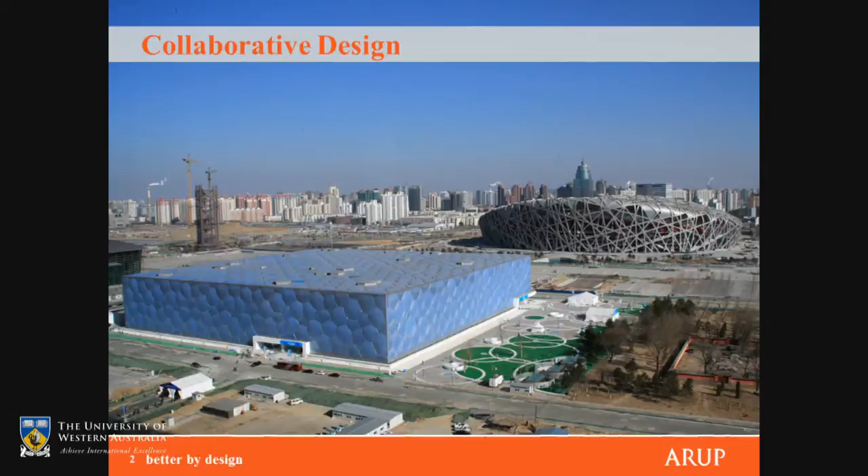It was a 10-week competition, and we did something quite unusual - which I'm surprised to say I've never done before nor since. What we did is we lined up the 10 lead engineers leading their disciplines to say on day one what success would look like to them, and what they thought a swimming centre should be from their discipline's perspective.

The mechanical engineers said it's about 14 degrees on average in Beijing during the year, but inside a swimming centre we probably want water temperatures of about 28, especially in a leisure pool, to keep people comfortable. Therefore it's a heating problem, and the best way of heating something is to absorb as much solar energy as possible, make use of it, and stop it getting out. So they wanted an insulated greenhouse.

The electrical engineers said, from a lighting perspective, that'd be great too, but only if we diffuse the daylight. Because you get real glare problems if direct sunlight reflects off swimming pools, and it becomes a safety issue.

The next people, who are highly influential and often not even in the room at the beginning of a project, were the acousticians. They said, that's all very well, chaps, but if we make it out of glass it'll sound awful. Tiles - you need around swimming pools for hygiene reasons - reflect sound, water reflects sound. If the roof and walls also reflect sound, it will sound appalling and be an unpleasant place to be.

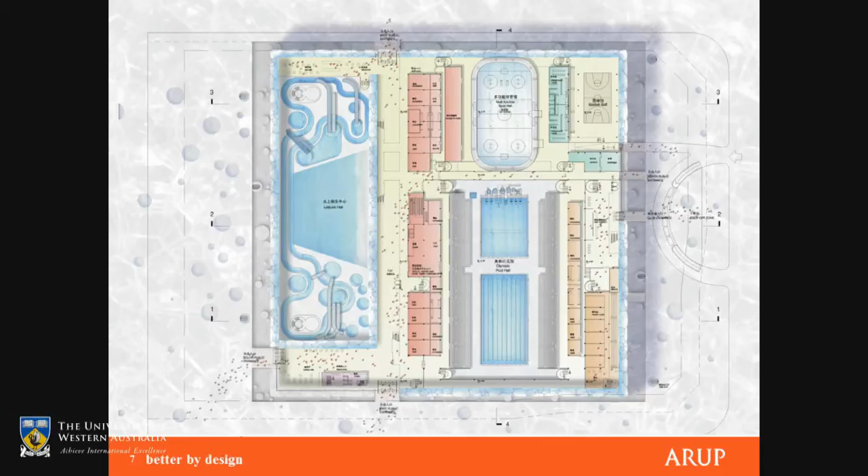But of course, architects also come in different flavours - it's not just the engineering disciplines that split ourselves up. What the Americans call program architects - I don't think there's quite an equivalent in Australia or the UK lexicon - those who worry about how a building should be laid out, which function goes where, worked out that really the key to a successful Olympic swimming centre is very simple.

It's to have a use after the Olympics. It's not so much about the actual competition pool hall, which is very specified, but about putting in as much leisure facility as possible for the people of Beijing to use afterwards. So they simply maximised the footprint of the building to fill the whole site, which happened to be square, and so we had a square building.

The urban designers, the people who care about how the building fits into the environment around it, said we've got this brilliant opportunity because the Olympic site is right on the north-south axis of Beijing, which goes through the middle of the Forbidden City and is the primary cultural axis of the city. Down to the south is the Temple of Heaven, one of the most important cultural sites in Beijing.

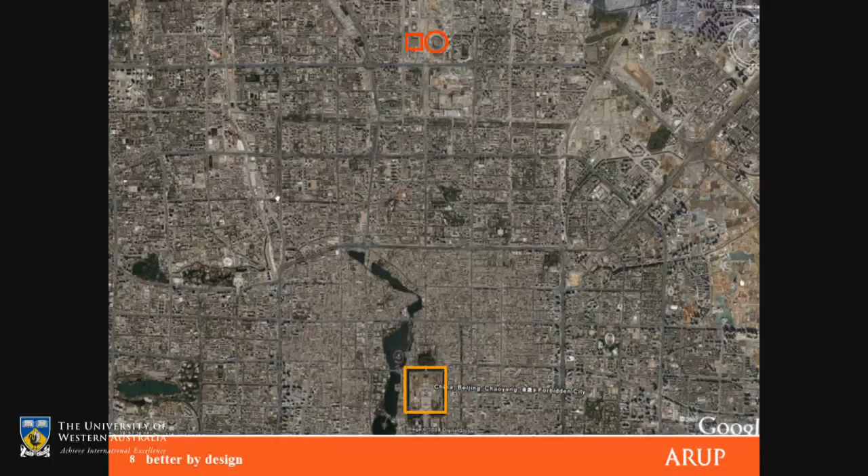The east-west axis is the commercial axis of Beijing. We had this opportunity from the master plan already proposed, where the stadium and the aquatic centre became the gateway from the city on this major axis into the site for the rest of the Olympics. So what they said was, it's how these two respond to each other that counts.

These were all very well. We put all these things up on day one, and four weeks later we were still arguing about what we were meant to do. The Chinese architects were drawing icebergs with mist curtains around them, while the Australian architects were drawing waveforms. They both agreed they wanted something that was absolutely a physical manifestation of water, thinking that was the way to win an international design competition. But we didn't actually know what to do.

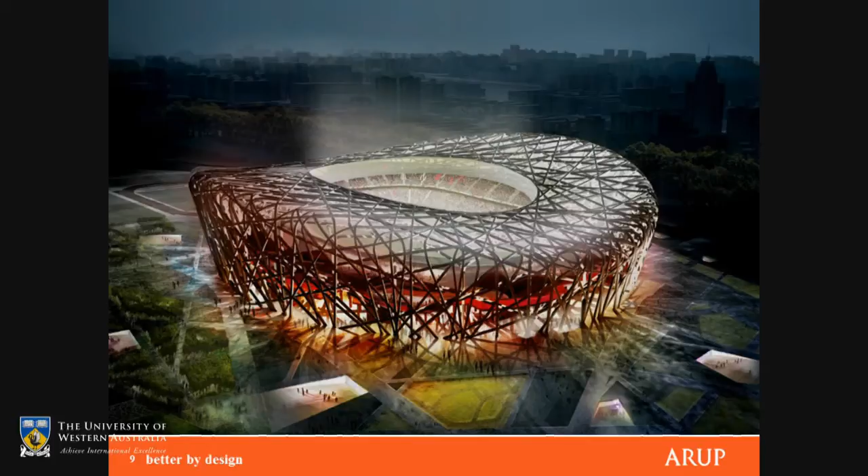Then, fortunately, our neighbour's Bird's Nest Stadium scheme was published. They were having a competition at the same time, just a little ahead of us. This winning scheme by Herzog and de Meuron, with Arup as engineers, came out in the press. I'll never forget it, twenty people sat down around a table and said, okay, theirs is red and round, so we'll do a blue box.

I know it sounds trivial, but it was honestly like that. It was simply that we wanted yin and yang. Red in Chinese cultural mythology is masculine, blue is feminine. Circular things speak to the heavens, square things speak to the earth. One's internally focused, one's externally focused.

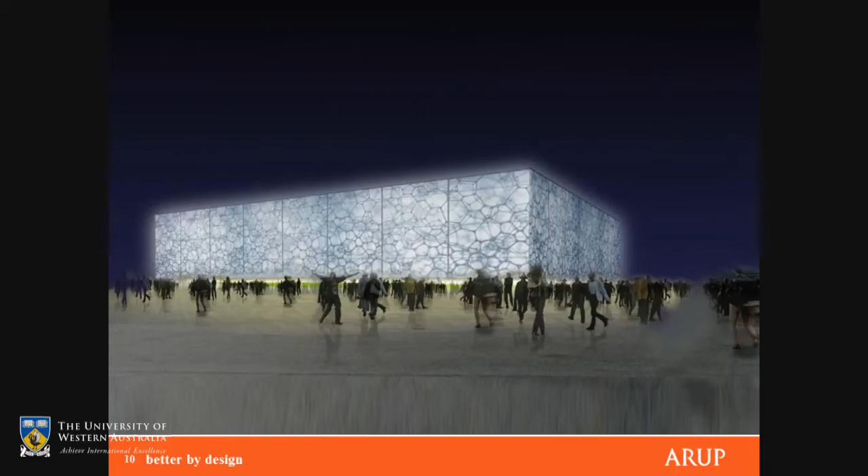At the same time, we brought all those ideas from the first day, which had been sitting in people's heads but hadn't actually been put forward properly yet, to the table. We made it out of ETFE, made it an insulated greenhouse, gave it natural light, and made it sound good.

So the structure, my part, was undetermined at this stage. But we did know we needed two layers of these ETFE pillows, because to make ETFE—a 0.2 millimetre thick plastic, really just a polythene bag—into something that could do anything, you have to inflate it with air and make it pressurised. We knew we needed two layers of these pillows to keep the heat in at night, otherwise all the heat gained during the day would just go out again.

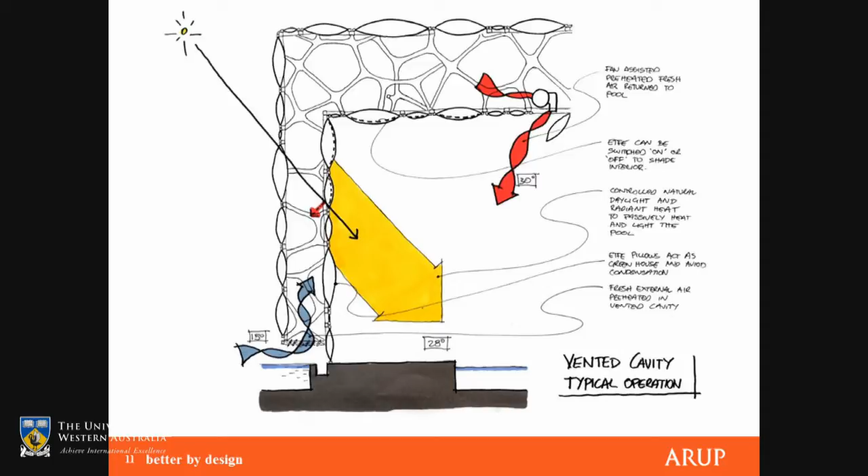At that point I looked at this and said, that means there's a space between the inside pillow and the outside pillow where I can put my structure, neither inside nor outside. Then I thought, well, how does that structure want to inhabit that space? It's not a question we normally ask. We normally ask how structure encloses space for human habitation, how you build walls and roofs. I suddenly thought, how does structure inhabit space? I realised that question had never arisen before—I'd never heard anything at university or afterwards that answered that.

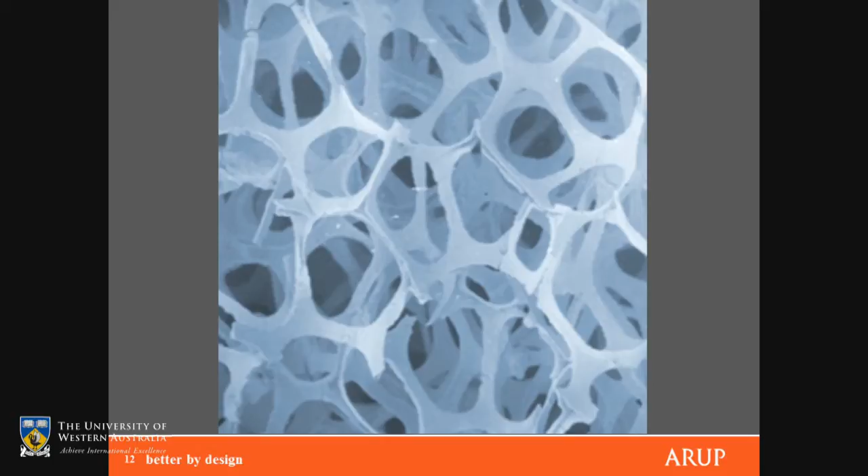Then I saw this photograph, which I took to be some piece of biology, an organic material, and I said, that looks to me like structure inhabiting space. That's what we're going to do. That was a great aha moment, followed up with: but what is it? And how do you define it? And how do I work it out?

Then the magic—2003 was really the early days of the internet, and I found that the World Wide Web could help with all these matters. So I went out and did some research.

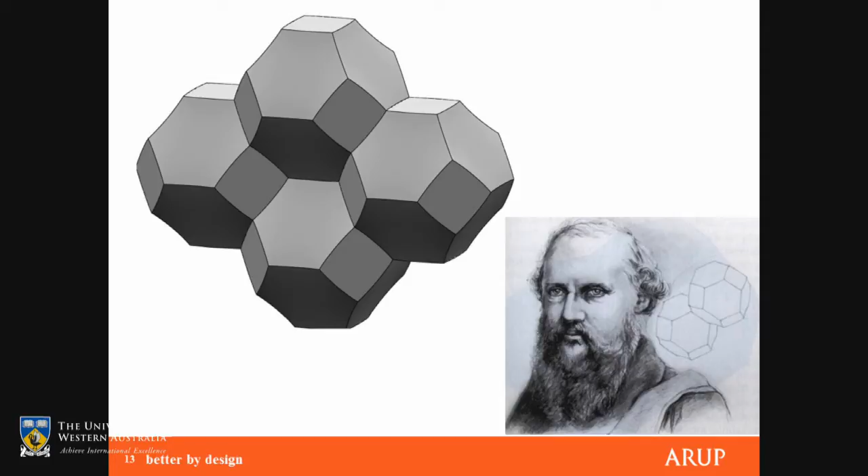I found out that Lord Kelvin, in the 1890s, had asked the question: how do you subdivide three-dimensional space in the optimum fashion into equal volumes? He came up with this thing called Kelvin foam, truncated octahedrons, as the optimum way of doing it. All his friends and colleagues had a look at it and tried as well, and none of them could do any better, so they gave up. For 100 years, that was the answer. But it didn't look very exciting to me, and it didn't look very like my photograph either.

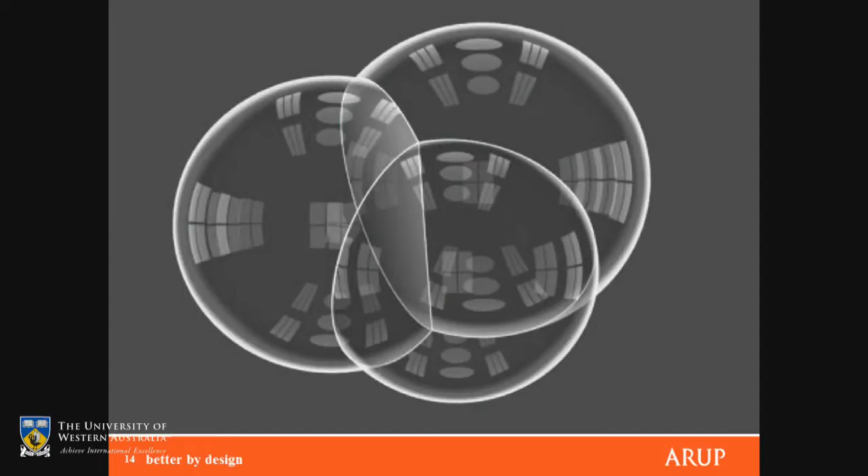I then found a Belgian physicist at the same time, a fellow called Plateau, was looking into soap bubbles. An infinite array of soap bubbles will also be the answer to how you subdivide three-dimensional space, because the surface tension will try to minimize the surface area, which is the same challenge. Plateau observed that soap bubbles always come together: three films at 120 degrees, and at the end of a line, four lines come in at the tetrahedral angle - I think it's 109.47 degrees.

So I said, well, that's the answer, isn't it? All you have to do is draw those lines and keep drawing them in a 3D CAD model, and you'll come up with the answer. Well, of course, it doesn't work like that - otherwise somebody would have worked it out a long time earlier.

Lastly, I found that a fellow called Professor Weaire and his PhD student, Dr. Phelan, in Trinity College Dublin, in 1993, about 100 years after Kelvin, had come up with a formation of geometry which was more efficient than Kelvin foam. It's made of these two polyhedra collected together to form the molecule, which then repeats. It's mainly made out of pentagons with the odd hexagon in it.

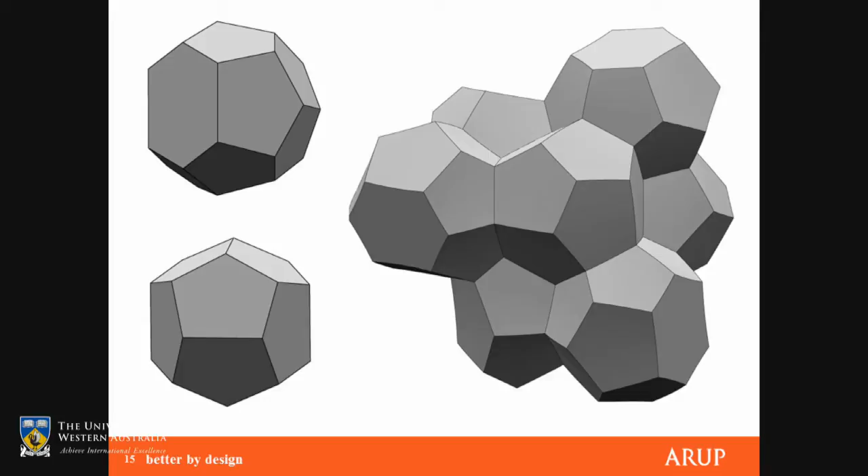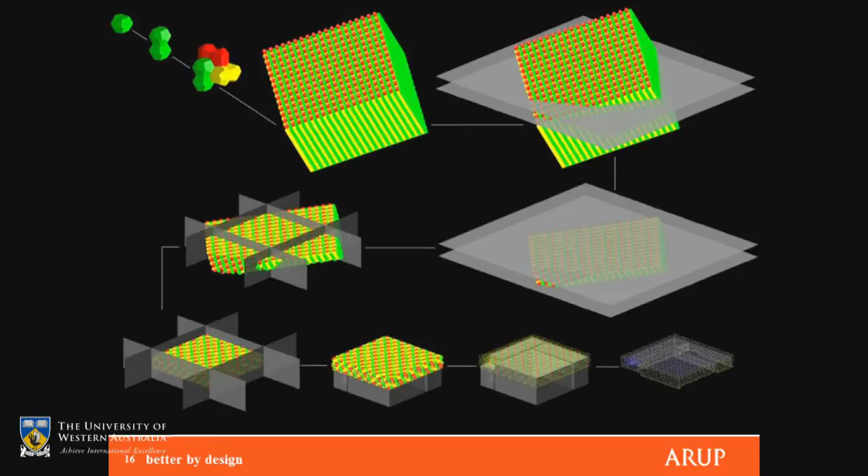What I found is that if I took a very large block of Weaire-Phelan foam and then cut it at a skew angle - that was the clever bit, or the odd bit. Going across the top from left to right, then the middle from right to left, then the bottom, you see how we did it. We took a block of the foam at a skew angle, chopped out a 50-metre height of it, then on plan in the middle, chopped out a 200-metre square box. Then on the bottom, we hollowed out the spaces, the volumes we wanted to occupy, the actual halls inside the centre itself, and you end up with this wonderful structure.

This was really new to us, because all of that was done inside a machine. It wasn't done on the back of a napkin. It wasn't done with paper and pencil. And it came out with 22,000 elements joined together at 12,000 nodes or intersections.

And we said, that's it, that's what we want to do. It's going to be a structure like no other. It produces a wonderfully random pattern for the pillows to go on the surfaces, which is just what the architect liked. The only question now was, how do we show the judges that this is what we're putting forward?

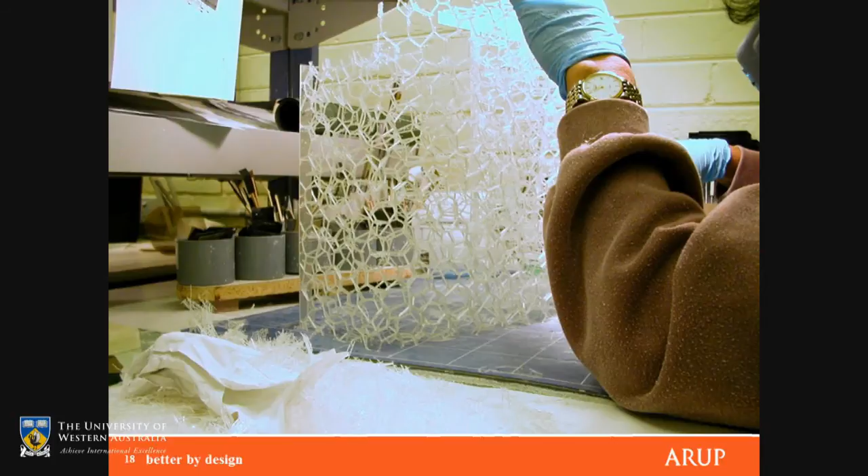So we said, that's easy, we'll just make a model - a physical model. As you might realize by now, this isn't going to be an easy thing to make a physical model of. So we said, that's okay, because there are these things called rapid prototyping. We'll make one of these wonderful models using a computer-driven rapid prototyping machine, never been used in the architectural engineering world before, but commonplace in the car and aerospace industries. But nobody had ever made a model with 22,000 different bits in it - they were used to making one piece that was a complex shape.

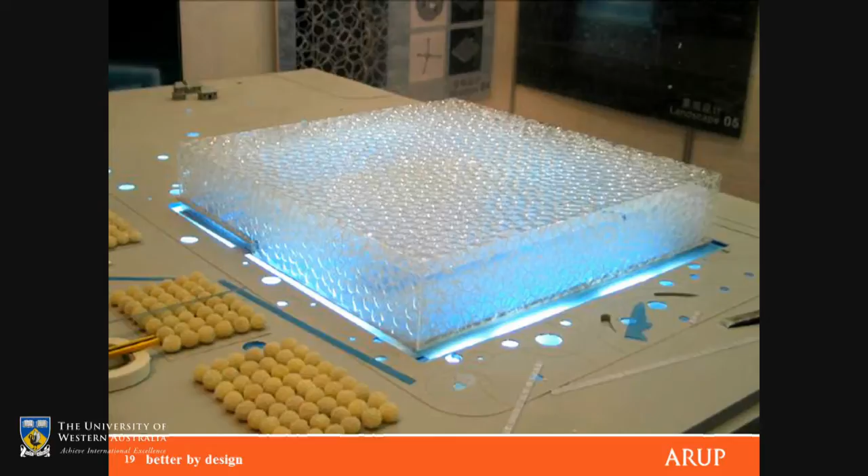It took us 4 weeks eventually to get our data in the right format to get the model to work. We made this model 24 hours before the deadline for the competition, and shipped it from Melbourne to Beijing overnight, where the Chinese had handmade the surfaces, which they glued onto the model. I'll never forget, I got a phone call saying the north wall doesn't fit. What'll we do? And for some reason, I have no idea why, I said, what happens if you turn it round?

And luckily that was the answer, and it did fit. We made the model and submitted it, and fortunately won the competition, which is great because we won from the jury, the official judges, but also the Chinese put it on the internet for public voting. Sometimes that had happened before, and I'd normally cheated a bit and asked everybody in Arup to vote for the Arup scheme. In this case, we won by 1 million votes, so I don't think the Arup voting system would have made much difference.

Then you get this incredible euphoria when you win a design competition. But of course, to win a design competition, you normally push the boat quite a long way from the shore. And then the next day you wake up and you think, aha.

Now we have to make it work. So from a structural point of view, I built an analytical model. You might think I should have done this before, but we were so busy making the physical model to convince the judges that we hadn't thought about the analytical model. I mean, it looked like a structure, it felt like a structure, if you like, it smelt like a structure. But was it one? The first time we built an analytical model, I couldn't make it stand up.

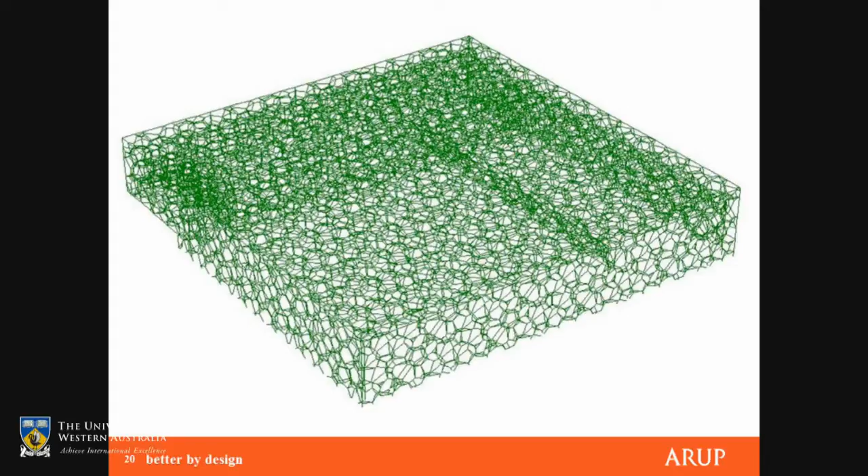If the elements were put in rather large, to make them strong enough, they were also too heavy. And if they were put in smaller, then they were too weak and the thing fell down. So again, in this brand new digital age, we invented a whole new analytical process that sorted it out for us. What we did is very simple. It seems trivial, but it was one of those breakthroughs.

You put every element in rather small, you analyze it, you find out the stresses in every element and compare it with literally the code of practice of China, not some arbitrary number, but the actual code of practice of China. If you didn't meet the code, make it bigger by one small increment. And if for some reason it seemed to be larger than it had to be, make it smaller by one small increment. Don't try and guess the actual answer, just move it in the right direction slowly.

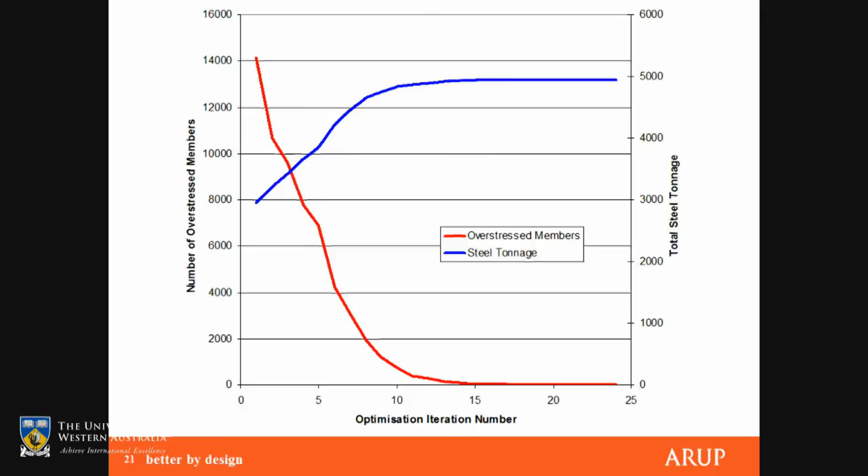And what we found after a lot of experiment was it would converge, as you can see here, after about 20 cycles, on a stable answer, which also, I'm glad to say, proved it was also an efficient structure at about 5,000 tons of steel. This picture shows you slowly - every different colour there is one of 10 different sizes. We only used 10 different sizes in the whole model. You may be able to work out now why I couldn't guess which one went where.

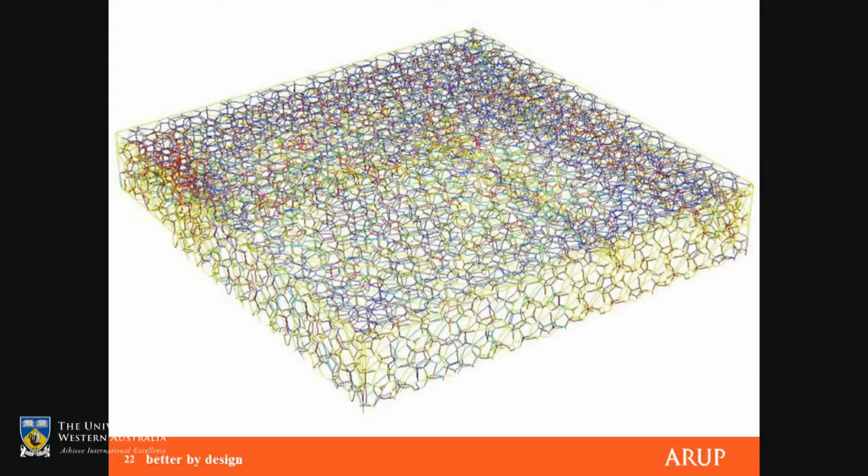Actually, the thing is so highly redundant for the structural engineers in the room that you could come up with an infinite number of solutions that also worked. It didn't matter which one you used, as long as it would then produce a set of calculations that would satisfy the Chinese authorities that in a linear elastic state, it would comply with the Chinese code. Every time you ran it, you got a different answer, which was rather nice - every day we got a different structure. So we just said one day, okay, we'll have that one.

Moving on, this shows you its dynamic properties. It is a completely framed structure - there's no triangulation in it. So it relies entirely on the moments at the end of each element.

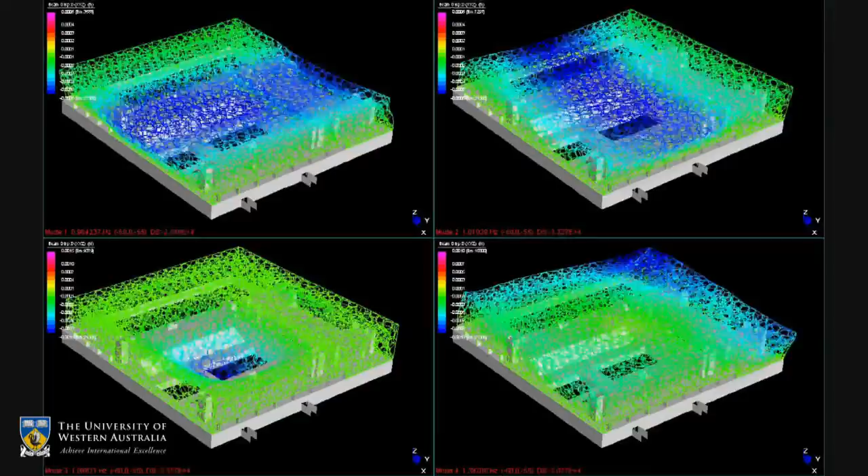What's really strange about this is these are the first 4 modes of vibration. So the top 2, left and right, not surprisingly, are very similar and have a frequency of about 1 hertz. And because it's a square thing in the end, it's doing roughly the same thing. But what amazed me is that the bottom 2, the vertical and the torsional, are the next 2 modes, and they're also around 1 hertz. I still don't know why. I can't tell you why.

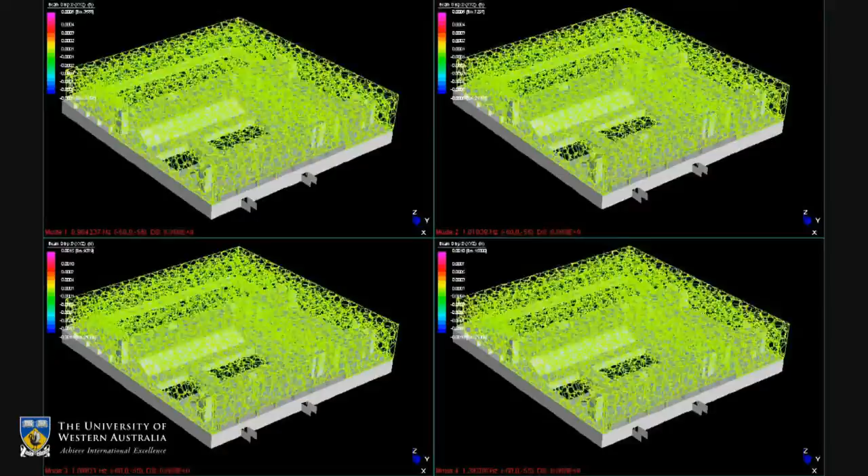But what it meant was, in an earthquake - and earthquakes are the major dominant load in Beijing - every single element played its part in absorbing energy, or could play its part in absorbing energy from the earthquake. So it actually turned out to be the most earthquake-resisting building in the world, probably. I can't prove that, but I can tell you it takes more than 1 gravity sideways, and it's still standing up quite easily. It just forms plastic hinge after plastic hinge after plastic hinge after plastic hinge until it gets to 44,000 of them before it gives up.

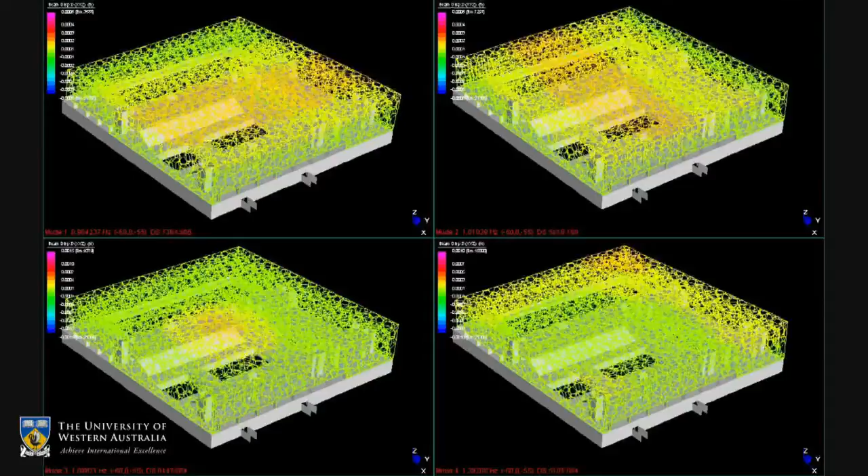Having done all the sizing of the elements inside the computer, we then wrote a piece of logic that said, well, we'll make the nodes spherical because that's an easy way of elements coming together. We'll size the spheres according to the size of the elements coming into them, and we'll write a rule so we'll develop all the spheres as well. Then all the elements get cut back until they meet their spheres. And then we have what we now call a BIM model.

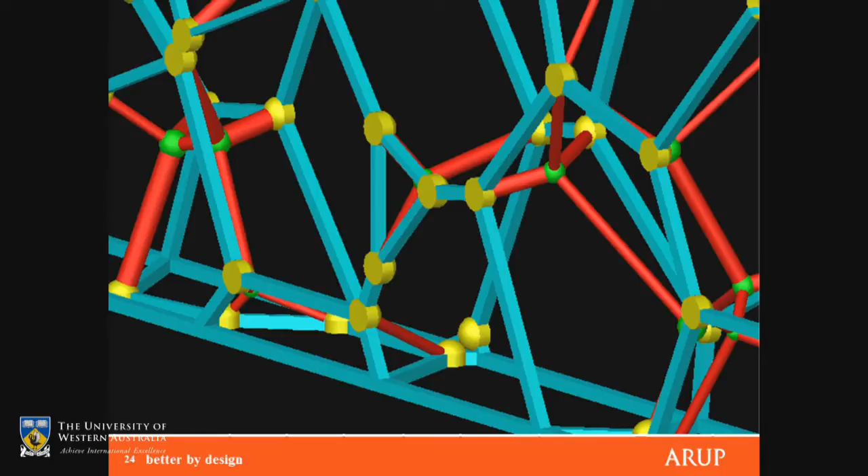We have a fully defined piece of structure. So far, it hasn't been touched by anybody, hasn't been meddled with manually, if you like. We got it down to where we could redo the whole structural process if, for example, we wanted to make the building smaller, which we had to do several times, or add a doorway, or do something to it, in 3 days. So we could go 3 days from changing it to having a new set of construction documents.

The construction documents we could portray in lots of different ways. Up till now, I'd always said there should only be 1 set of contract information for fear of contradiction. So it was normally the 2-dimensional drawings with the contract information. Here we said, well, actually, as this is just a set of data that hasn't been touched by anybody, then we can represent it any way we want.

So we can represent it, as you see on the left here, as a wireframe model with a lot of tags on it and a whole set of data saying what each tag meant. Or we can represent it on the right-hand side as a set of 2D information, or at the bottom of the right-hand side—you can barely see it, I'm sorry, it's a bit washed out—3-dimensional views of the actual connection details, for example.

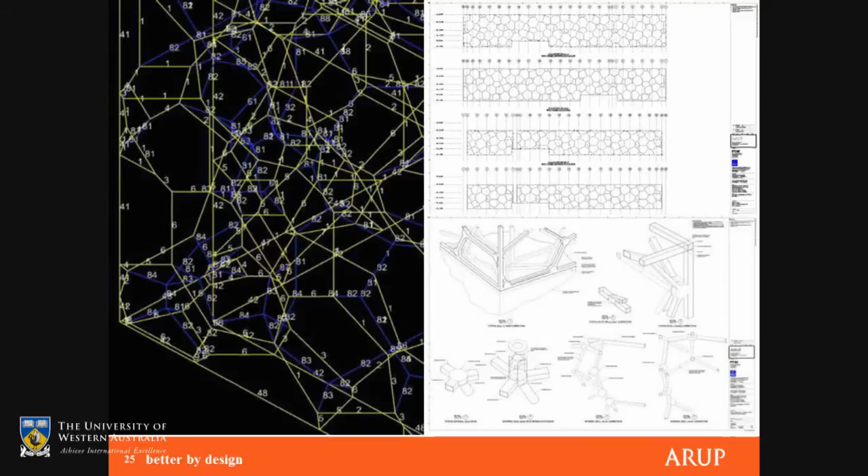But there was some magic in the original geometry, and that is that even though the tube sizes were different throughout the building, the geometry repeated because it had come from that piece of Weaire-Phelan foam that repeated. So we said the way to build it is to make a jig, which would always be a fixed jig, and you make up these little 4-legged elements, and then on site you bolt them together. And as long as you bolt the right ones together in the right order, you get the structure we first thought of. But the Chinese said, well, that looks a bit hard work.

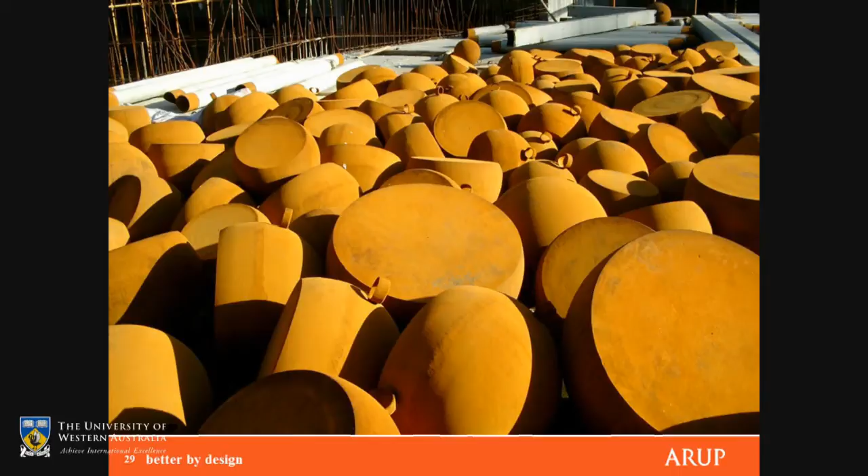Why don't we just make lots of tubes and lots of balls and a big scaffold, and we welded it together. And they did. And I have no idea whether they welded the right ones to the right ones—none whatsoever. But, I say that flippantly, because of the huge redundancy in the structure, it doesn't actually matter. You form plastic hinges wherever you needed to, and it would redistribute—the strength was there somewhere, if you will. Actually, I think they probably got it right. They took it very seriously.

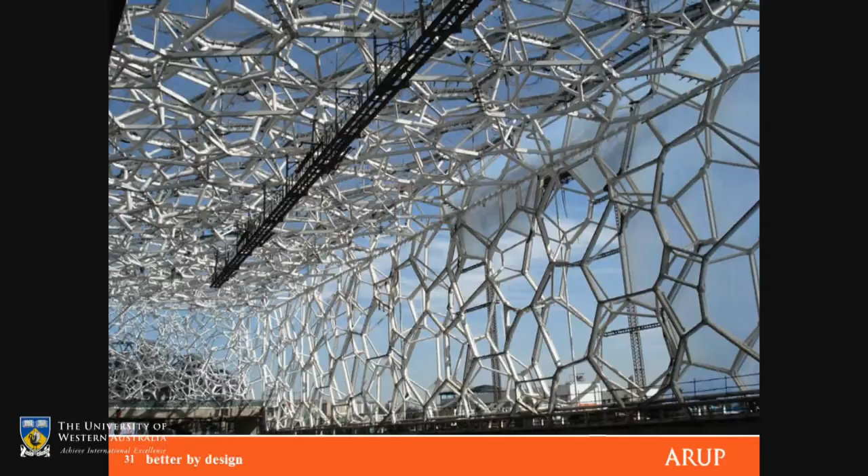And then eventually, a year later, they took the scaffold out, and we began to see what we had constructed. This is the inside of the leisure hall that you didn't see during the Olympics. It was still not fitted out. And then it was finished.

So I was invited to the official opening on Australia Day in 2008. I got the invitation at 5 p.m. on a Friday that the official opening was going to be at 9 a.m. on a Monday. But fortunately, I managed to get there.

So it's a bit like the Sydney Opera House. It changes its mood and feeling according to the lighting conditions and what you get before it, which wasn't something we totally predicted. But it was still quite nice.

And then we went inside. Inside the main pool hall, we're actually only getting 5% daylight, because the television companies wouldn't let in more than that. If it's any more, they'll black it out anyway and use floodlights, because they're worried about controlling light for television. A bit like our cameraman at the back who's spotlit me to make sure I can be filmed.

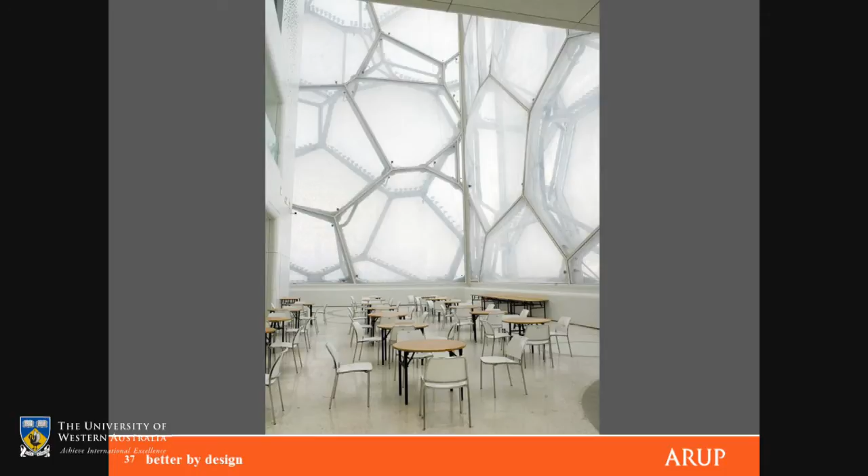This, I think, was my favourite space. This was just a cafe in one corner, but it had a real sort of serene, calm feeling, almost spiritual.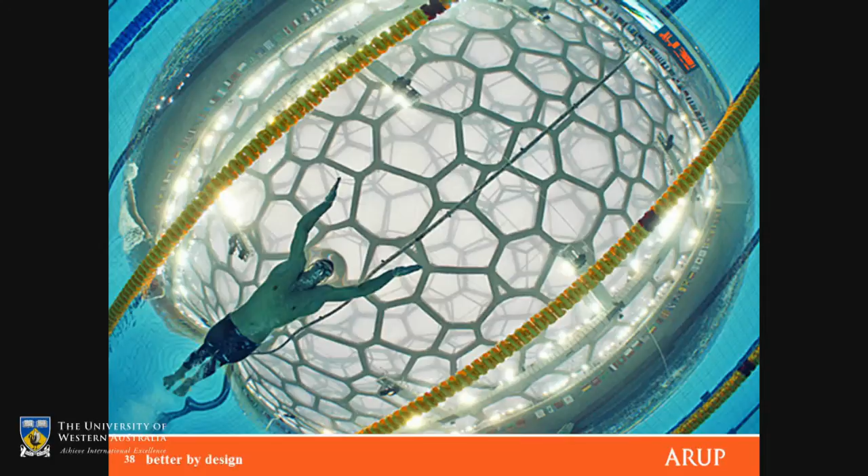And this is Mr. Phelps winning his 7th gold medal. 25 world records were broken in the swimming centre in Beijing. And to this day, I will uphold the idea that it was because it was such a beautiful place to be that caused the athletes to perform so well, and it was nothing to do with the sharkskin suits they were wearing.

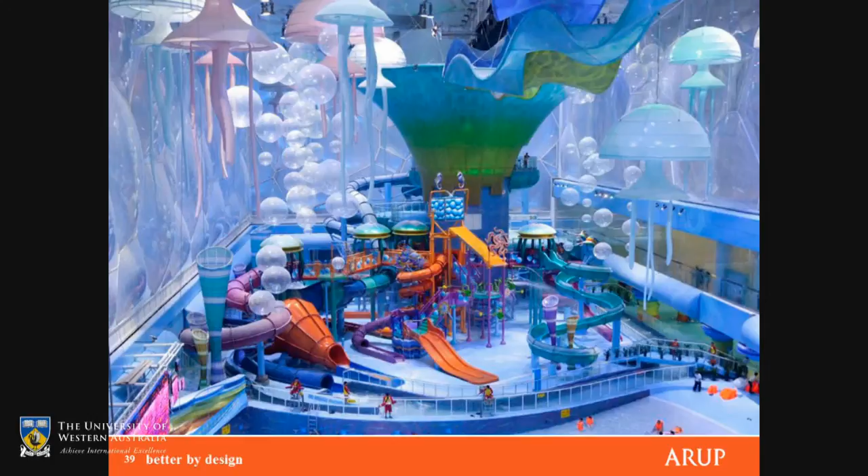And then this is the bit you didn't see at the Olympics. This is the leisure centre. So this is the legacy. This is what the people of Beijing get to use every day now.

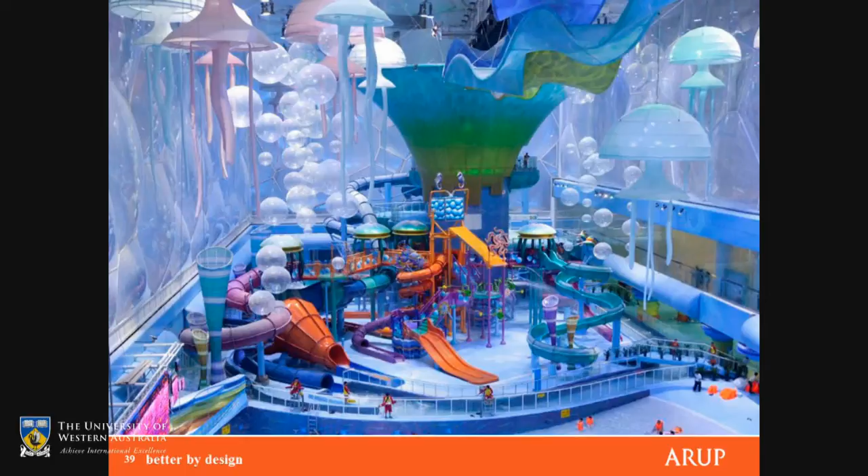At one time, the Beijing government said they didn't want to make it into a leisure centre. They'd rather make it into a posh restaurant because they thought it was so good that it should be very expensive to go into. We pleaded with them that we would much rather it were for the people of Beijing, and they acquiesced, which is great.

So there we have it. The two form this gateway. I think if you think about the Olympics, you don't remember any other buildings really than these two. There's actually a building right next door, the main convention centre, the main indoor arena, which is larger than either of these, but you probably can't remember what it was.

So I've got 3 slides among these talks about projects, pointing out some of my approaches to life or to design. The first one is, at Arup we say we shape a better world. That's our strap line, if you will. But what do we mean by that? For a long time I thought it just means we've got to make the world sustainable.

Now, I don't back down from that at all. We do have to make the world sustainable. But sustainability is a lot about reducing impacts, reducing environmental impacts, reducing financial costs, reducing social impacts. That could produce many different worlds, actually, that comply with that. And which one do we actually want?

So what about the benefits? What are we actually trying to do as well as being sustainable? In my view, it's about improving the world for people. There are tons of different levels you can look at that: make people safer, make them healthier, give them more functionality, more amenity. But ultimately, it's also to inspire them.

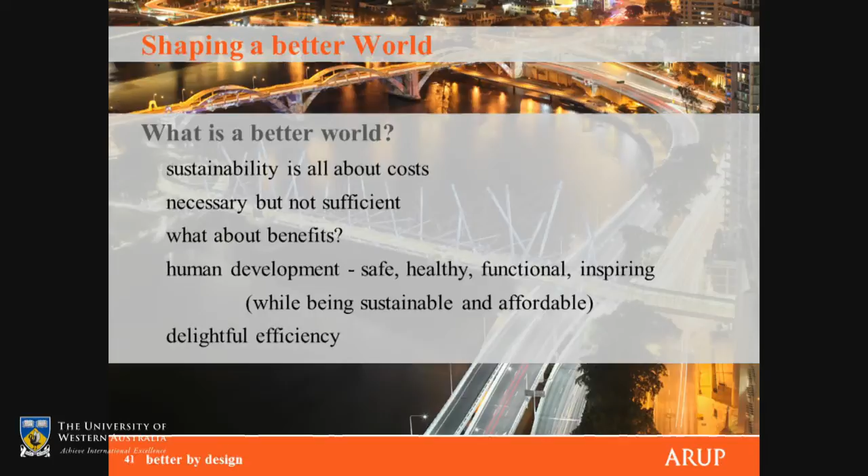So I sat down with my best friend, Philip Cox, and did this competition for a stadium in Durban for the Soccer World Cup. And you might notice that it never got built. It wasn't part of the World Cup. I still haven't got over losing this one, so I'm going to tell you about it instead. Okay?

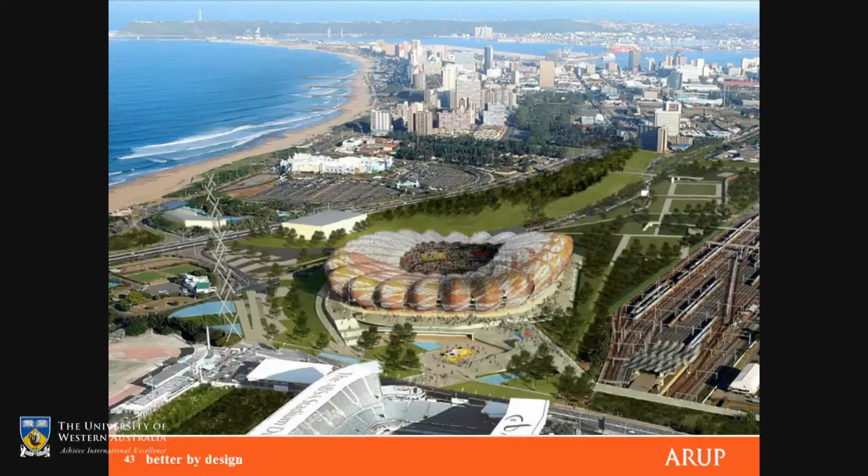This is about how an engineer and architect can try to come together and trust each other enough to work out how a form will work both as structure and architecture. It's a pretty intense and trusting arrangement because, particularly for Philip, he has to trust me that when he comes up with something he likes the look of, and I say that doesn't really work as a structure, that I'm right, and that I'm acting in his best interests, genuinely trying to find something that will work as a structure and look the way he'd like it to look.

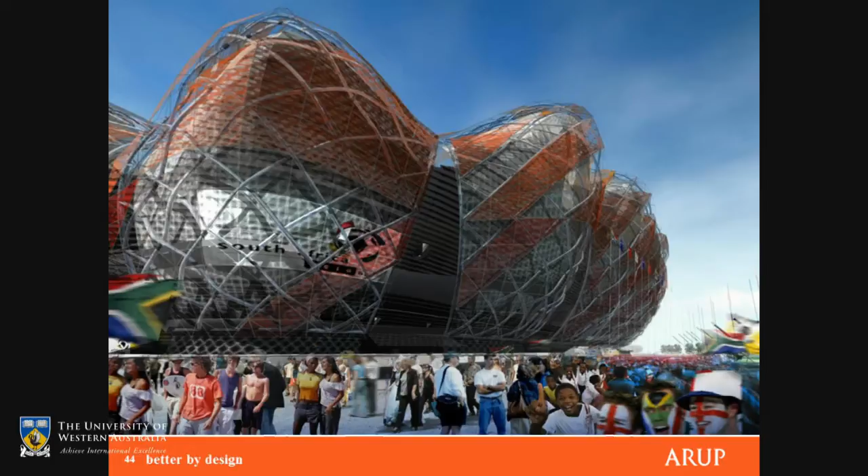After a while, we came up with what we thought was a really beautiful building that also worked highly efficiently. I'll just for a moment describe how it works.

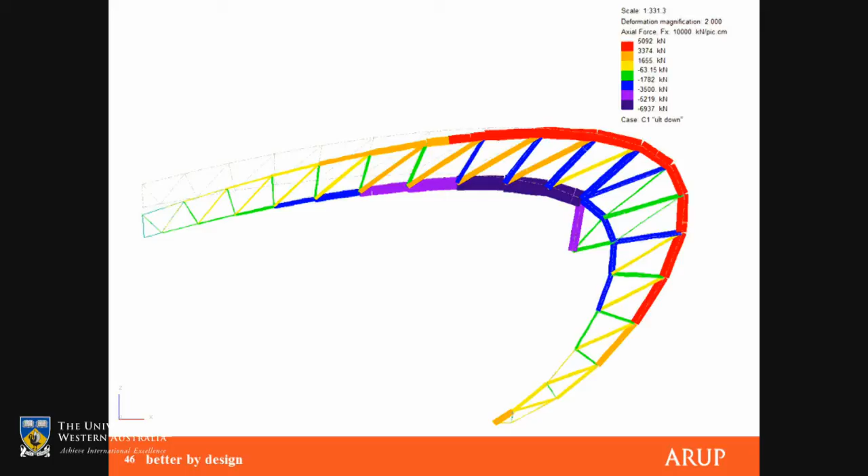If we were to work like the Bird's Nest Stadium, which are really just these big deep trusses spanning across it, this is a cross section showing something like a 9-metre deep truss cantilevering 70 metres. It shows you've got tension in the top chord and compression in the bottom chord under a vertically downwards load.

But when you do that in 3 dimensions, you have to put them sort of 12 metres apart, with spanning elements between them to hold up the cladding. You have to keep the compression chord stable laterally, so you add another layer of structure at the bottom. It's now looking pretty nasty, so you probably add a ceiling underneath, which indeed the Bird's Nest has, and you end up with a lot of steel and a bit of a jungle.

If instead you take exactly the same principles and smear them out into 3 dimensions, offsetting the bottom chords from the top chords, you can have a structure where all the structure is carrying the cladding, and where the structure is also auto-stable. That is, the difference in curvature and the offset keeps everything from buckling. You literally take out 60% of the weight by going from the truss structure to this one.

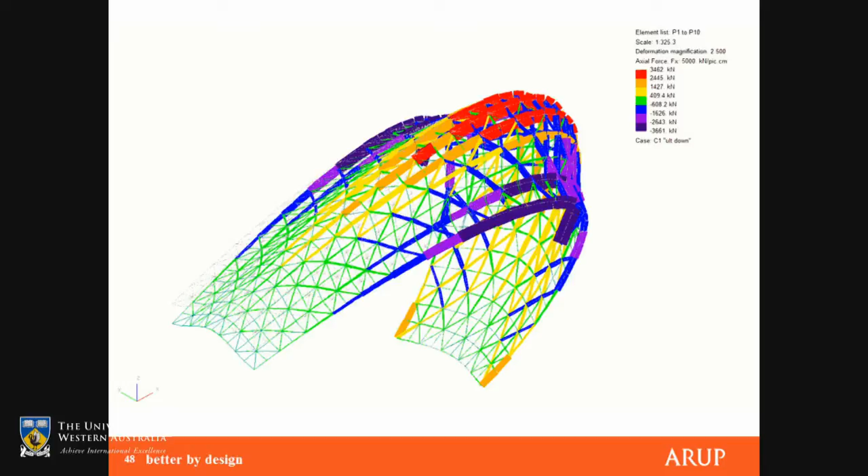In our case, the brief was for a stadium that could hold 70,000 for the World Cup and then go down to 50,000 afterwards. We could put the 20,000 extra seats up into those humps in the roof, which wouldn't have been available to you if you'd done a truss with a ceiling on it.

And the last bit, of course, is the inwards curvature of the walls, which was part of what we wanted it to look like, and also gave you exactly the right amount of floor plate at each level for that particular stadium brief. Often in stadiums, you get a problem where the floor plates get bigger and bigger as you come down, but actually there's no more facilities needed at the bottom than at the top.

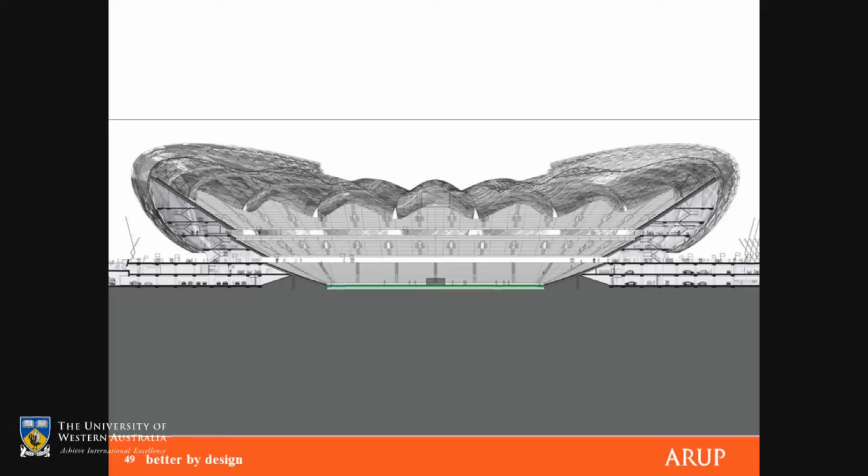The principle's the same, but it's a much more modest design. It's only a 25,000 seat stadium with a small roof. But what we did do is use parametric modelling to help us make it as efficient as possible.

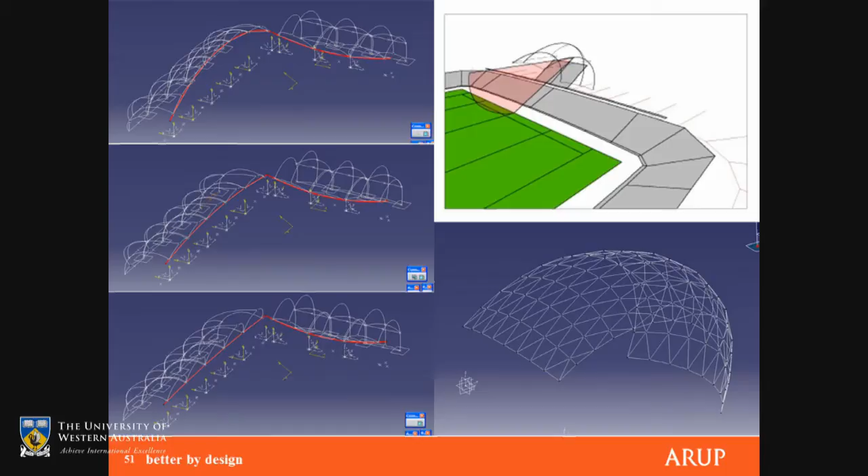On the left you see a program called CATIA, and the red line links the leading edge of the roof together. All the white lines are rule-based and follow the red line. So we've set up a whole lot of geometrical rules that operate from the red line. We adjust the red line a bit, and the structural model pops out - we size it automatically like we did at Beijing, using the same piece of software.

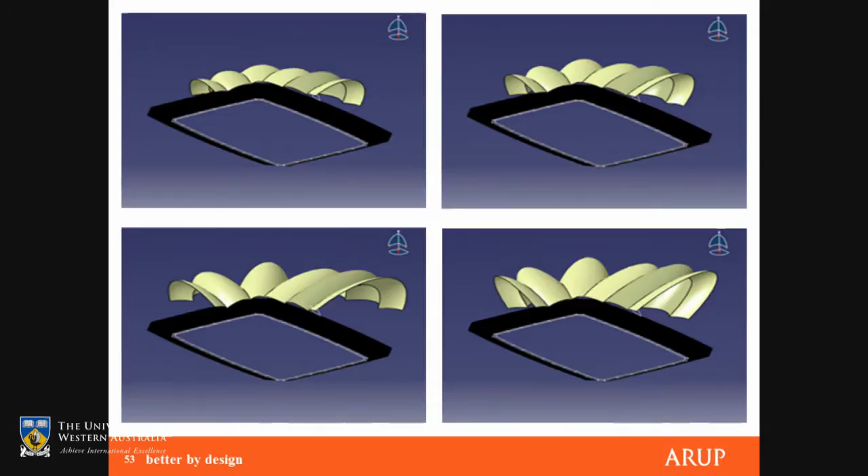The architect gets to look at it and says, do I like it? Do I not like it? Does it look better? We also looked at the panelisation of the facade, the cladding. Are we getting more or less repetition? Is it more efficient to clad it with this shape or the other shape?

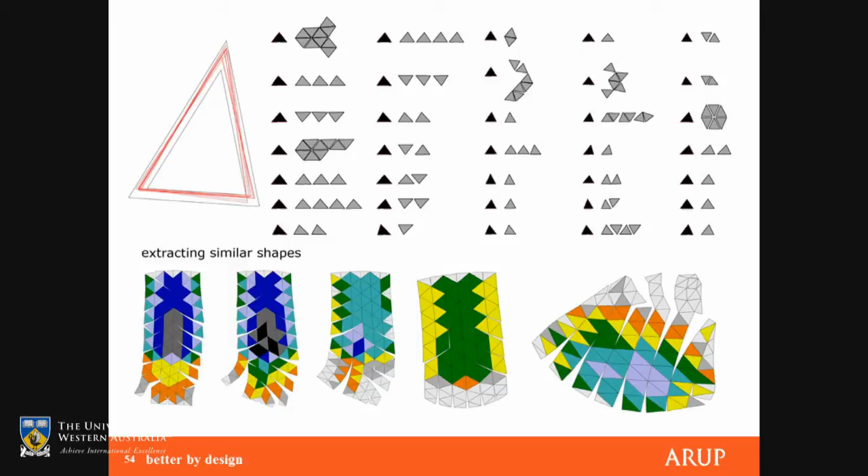In theory, you could link all these together and use some kind of genetic algorithm to sort out the most optimum solution. In reality, I find it's better to do it by hand - to adjust the red line, look at the different outcomes, and then think about how else you should adjust it to make it better. Which is more important: making it look good, making it repetitious, or making it less steel?

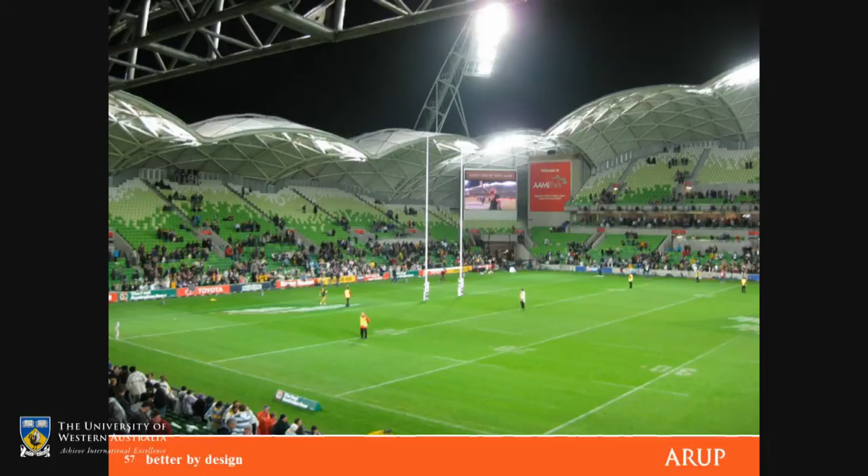In this case, we likened it to a club, where you might sit in your booth at the back. You might have your favourite piece that you always go to, that you occupy. It breaks up.

The inside of stadiums can be quite characterless. They all look the same once you're in them. We make them different from the inside, not necessarily from the outside.

Another thing, Melbourne is fantastic because here as well, you can see your stadium from the city. You can see what's happening. You can decide, am I going to go and watch a match tonight as you come out of work? Or am I just going to go and have a drink there? Or am I going to walk around the park? It's a great place.

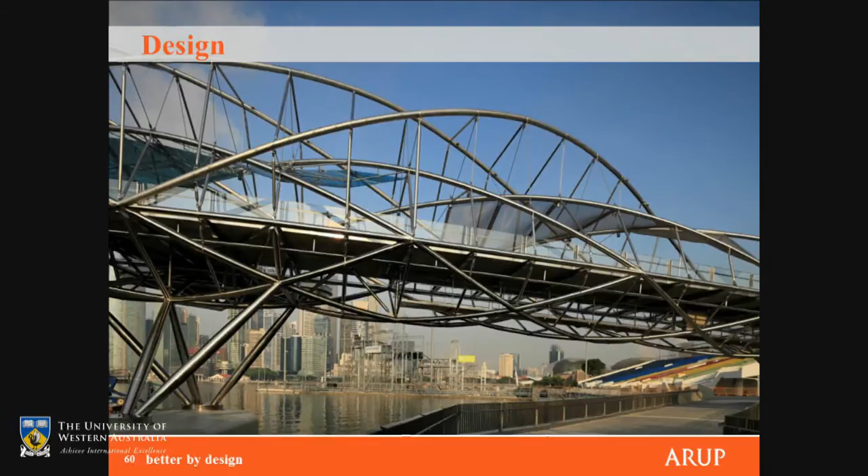So here's my second little philosophic piece, and that's about design. When I was first made an Arup Fellow 10 years ago, the first question I was asked is, so how do you do it? And I shrugged my shoulders and said, well, I don't know.

It's what I do. I'm not an academic. I don't think very much in those sorts of ways. I just do what I do. And so it made me think. So 3 or 4 years later, I decided that this is the way I tend to go about a project.

The first thing is to think about what do you want to achieve, not as a structural engineer, but what should the project achieve? What outcomes does your client really want? It's often not written in the brief, actually. You often have to go and talk to people to find out what they really want. And also, of course, stakeholders.

It's not just about what your client wants, but what do the end users want? What does the community want? What do people overall want?

The second one is a sort of what I think of as design actually being, is to challenge the status quo, to not accept that what's been done before is the best that can be done. It may be, but you don't accept it initially. You first say, can it be done better? And it doesn't matter what it is.

It could be a spreadsheet. It could be a project management plan. It could be how you write an email. It doesn't matter. All of those things, when you do them, can they be done better?

The third one, as I've said before, is trying to improve people's lives. And in particular, I think to get an emotional response at a human scale. I remember I worked for a wonderful engineer called Peter Rice when I was young, who unfortunately died young, like George, I guess. Peter said to me, Tristram, it doesn't matter if your structure is wizardly and wonderful. What matters is how people will respond to it. How will they think? What emotional response will you get from people who visit it?

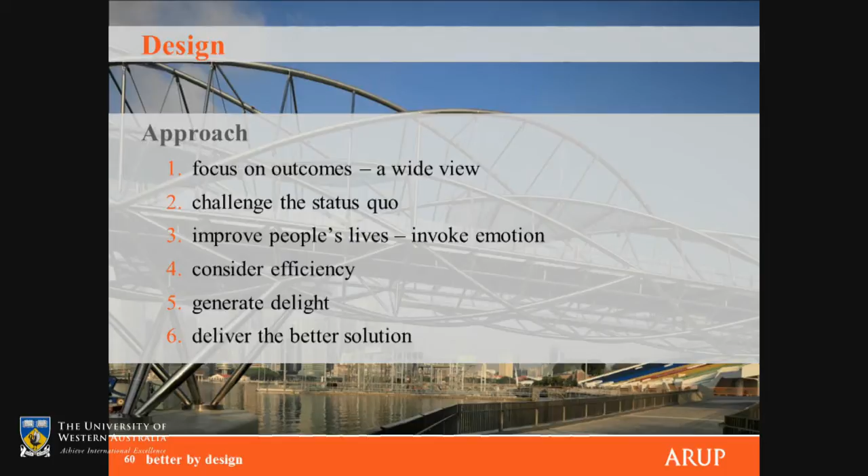So then, as I've already said, you make it as efficient as you can. You make it as delightful as you can. And lastly, and most importantly for us in our industry, you have to deliver it. It's no good it just sort of ending up like Durban did, in the ether. It has to come out and become real. And that's the hardest challenge of the lot. It has to be built.

So this project, I was asked to include some more international projects. So these are projects I've been working on recently that haven't always been completed. So this is about an airport in Kuwait with Norman Foster as the architect.

And the question here is, what actually are you trying to do in Kuwait? What's Kuwait about? And Kuwait's about heat and dirt, or dust, desert storms. It's about solidity and trying to find shade and the feeling of shade, even when it's not, or the feeling of coolth, rather, that comes from shade, and mass and masonry.

And this is a plan of the airport superimposed on Hong Kong's harbour. So it wasn't a small challenge that we were faced with. This airport is 1.2 kilometres from tip to tip as a triangular element. Yet, Fosters, in their wisdom, decided it should be made of concrete.

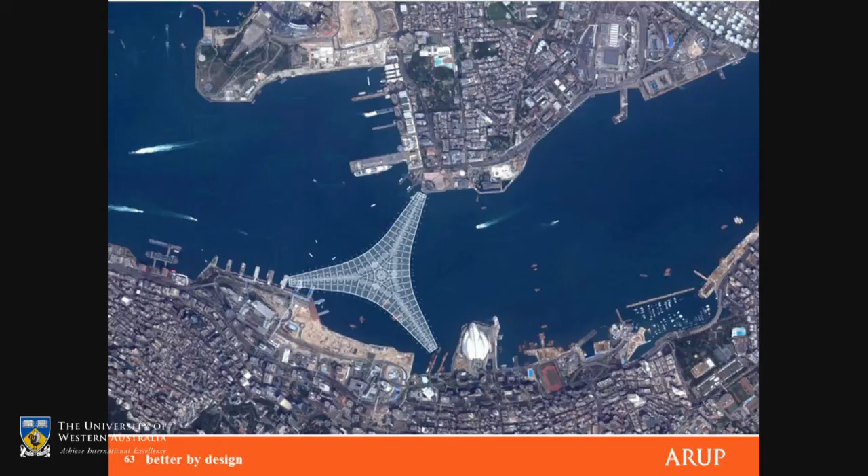So we were faced with a challenge of this, this is just one arm of it, of a concrete roof, probably 10 times larger than any other concrete roof ever built, with up to a 60-metre cantilever around all its edges, and a 48-metre span between it. And then how do you do this efficiently?

So we came up with a schema where the bottom is a set of arches and ribs out of post-tension concrete, like the Opera House construction, or big segmental bridge construction. Then on top of it, the idea of this lightweight concrete shell.

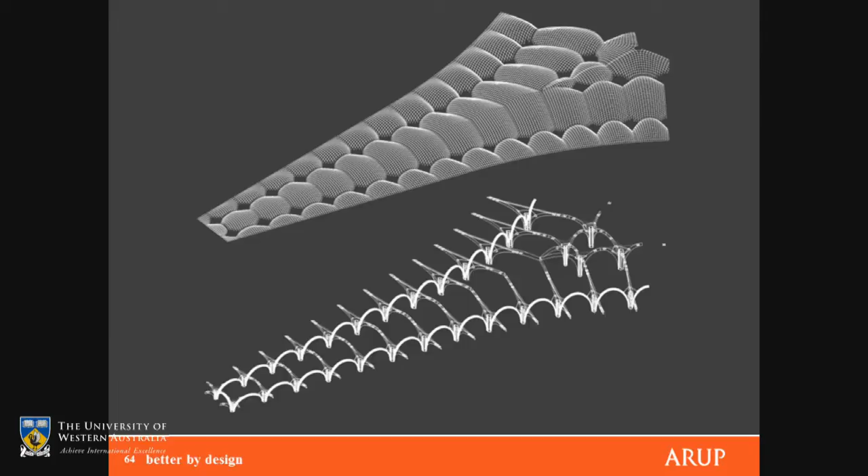But the lightweight concrete shell is not easy. In situ concrete, it would be 300 millimeters thick, which would weigh an awful lot. Every single panel is different, I should have said, all the shells are different. So the formwork would have been horrendous, and then it would have fallen apart under thermal loads because it's so big.

So in the end, we came up with this idea of using fruit boxes, we call them. So we call this fruit box engineering. The idea was if we make panels, I call these concrete panels for Foster's sake, but for me they're hybrid panels because they're steel frames with a concrete base.

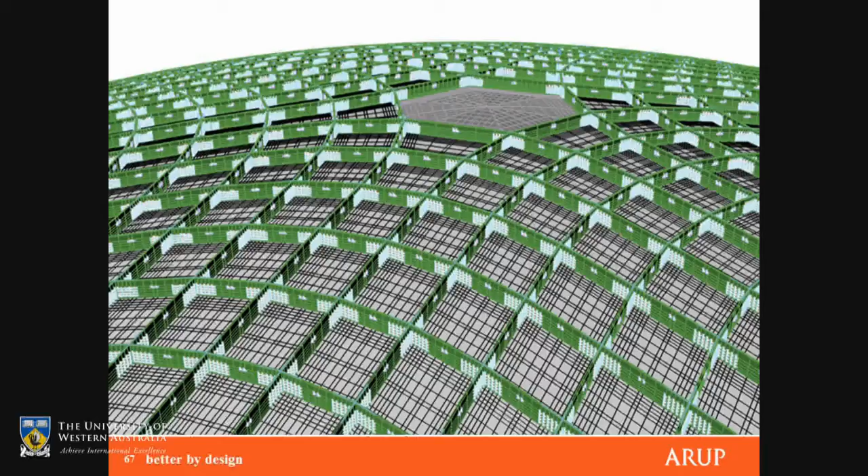And in theory, it'll all work, as long as everything is made accurately. This is an image of the central piece, probably the simplest bit of how it all goes together. Each piece is about 4 meters square, the fruit boxes, to give you a scale. And the concrete is only 130 millimeters thick.

And that shows you the more complex piece around the edge with the 60-meter cantilever. But it was applying a ruthless piece of logic, if you like, a piece of process across an analog idea.

Here's a fruit box, and this is its clever bit. Concrete will carry quite a lot of compression, as I think we all know, and therefore in compression it all forces itself together if it gets hot. But if it starts pulling itself apart, the concrete won't take much tension. So what happens is that the steel side plates flex and bend and allow it to go away.

So it was all about balancing stiffnesses. How do we get the right amount of in-plane stiffness so the shells worked, the right amount of bending stiffness so they stayed stable and didn't buckle in compression, but the least amount of tension stiffness so we could release the tension forces out of the concrete.

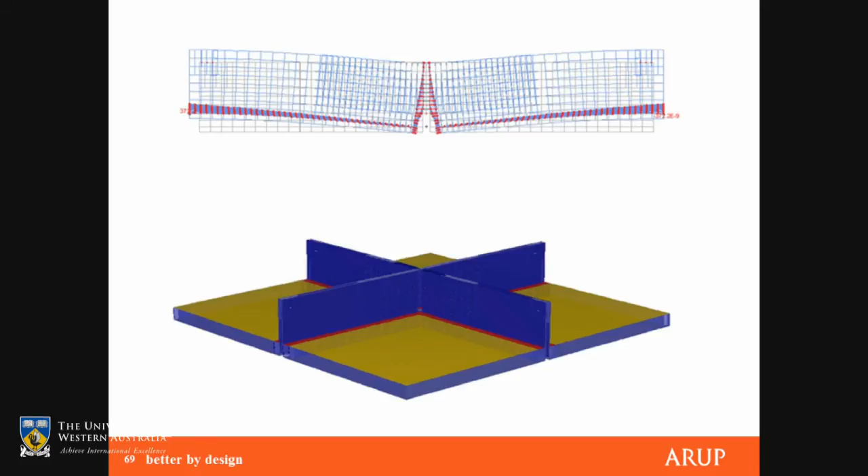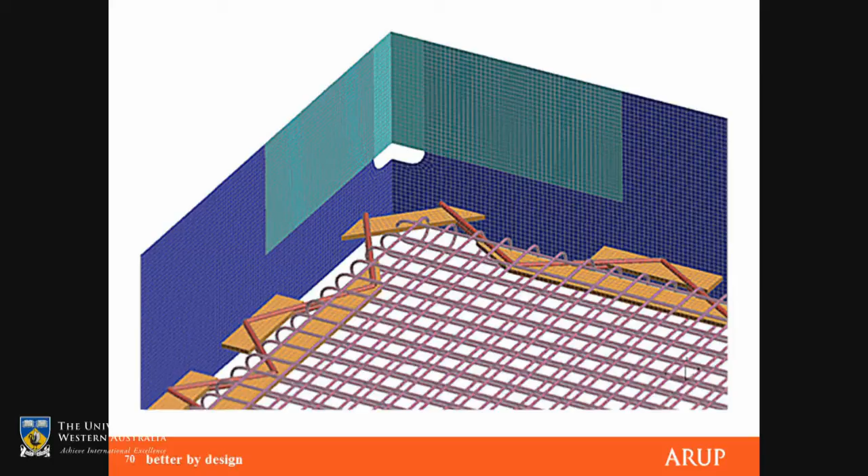And it was quite an ask, and we ended up using a dynamic nonlinear program to analyze every bar of reinforcement, all the welds, all the steel, in a nonlinear fashion, pulling it and pushing it and bending it, just to make sure that all those stiffness parameters were actually what we were going to get.

And there you see an image of the final product. This is only out to tender as we speak, so hasn't yet been proven to work, but it has been fully designed.

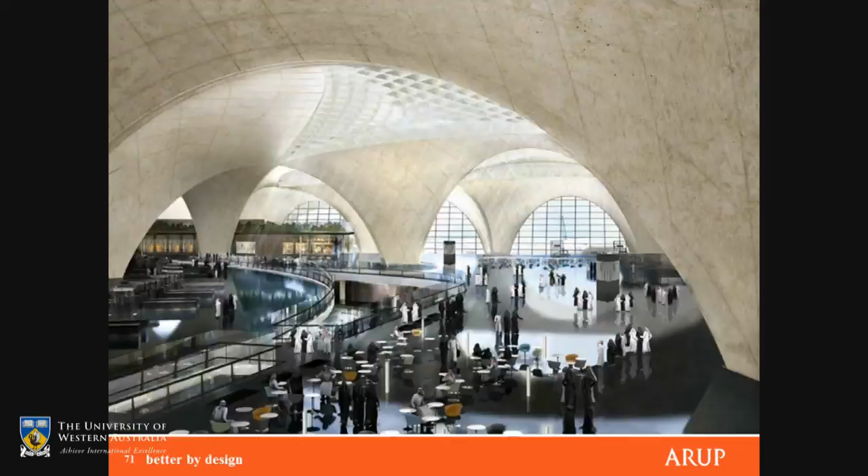Second to last is the Singapore Sports Hub. So this is a stadium for Singapore. Singaporeans are not known for being sports fans, but they wanted a national stadium for their national identity. So it had to be a multi-purpose stadium. One of its attributes is it has an opening and closing roof, so you can use it in the rain, and also keep people cool in the heat of the Singaporean summer.

The scheme, this is Arup as architects and engineers. The scheme we came up with is this enormous dome that clear spans across the seats, providing a moving piece at the top, a solid piece out to the edge of the seats, and then an open louvered piece at the perimeter. To give you scale, this is a 300-meter diameter dome. I'm told it's the world's largest dome. I haven't done my own research, but I'm told it's the world's largest dome.

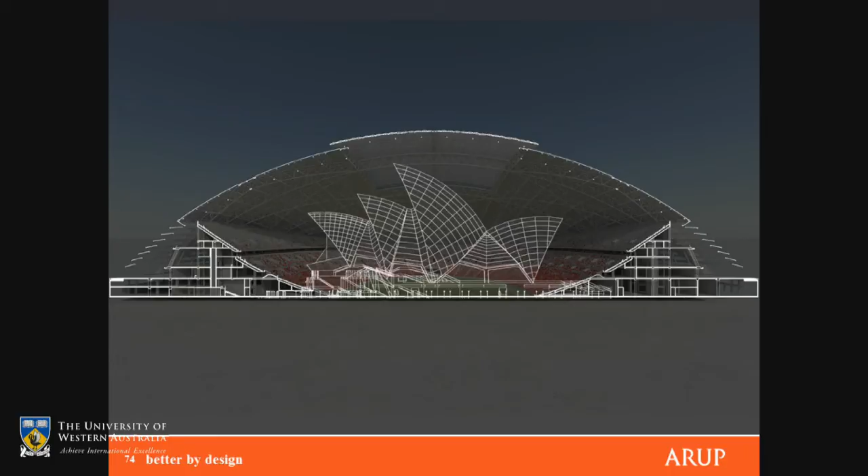And of course it can be open, so you can use it either in closed mode or you can open the roof, as you see here. Remember that shot, because the structure I'm going to talk about later is highly dependent on this problem: you've got a big weight that can be in the center or it can be separated, and then these naturally vented spaces at either side.

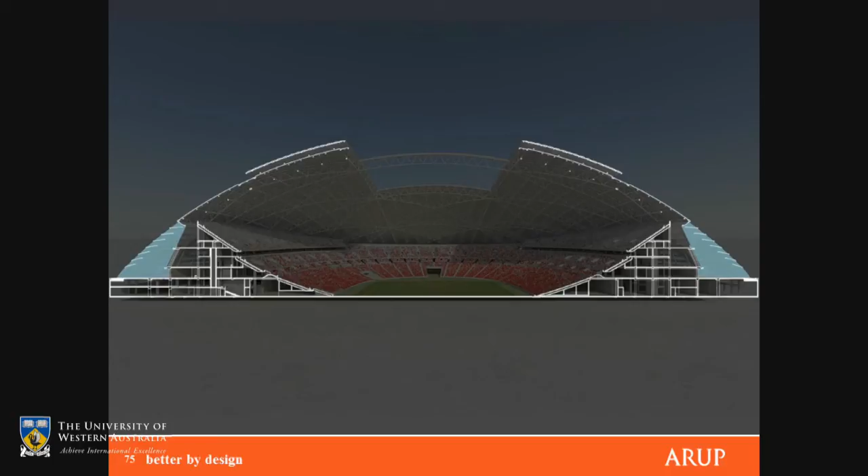So to keep people cool in summer, we provide under-seat air conditioning, if you like. But we're not going to try and air condition the whole volume. It's enormous. We're just going to try and produce local cooling.

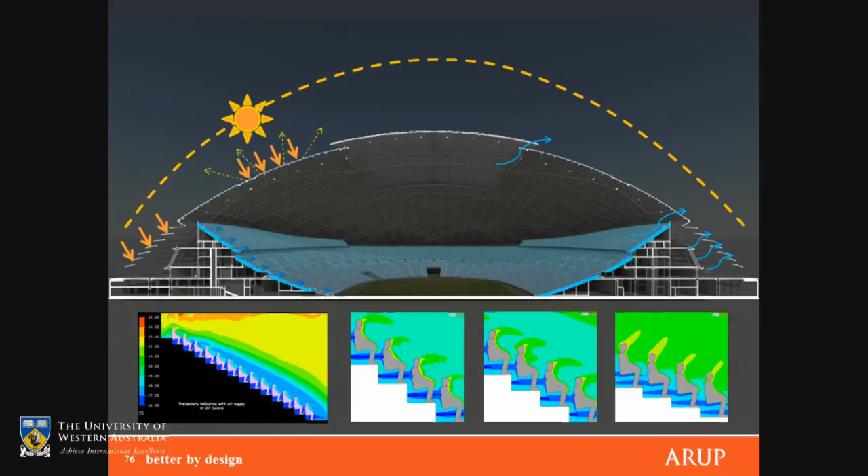Okay, so the critical part for the fixed roof is to insulate it as well as possible and to reflect things. But the critical thing for the moving roof, the top bit, is to make it as light as possible, because it's this moving load that will crucify the fixed roof otherwise. So it's this delicate balancing of everybody in the room talking about what do we want out of each component and how do we make it work.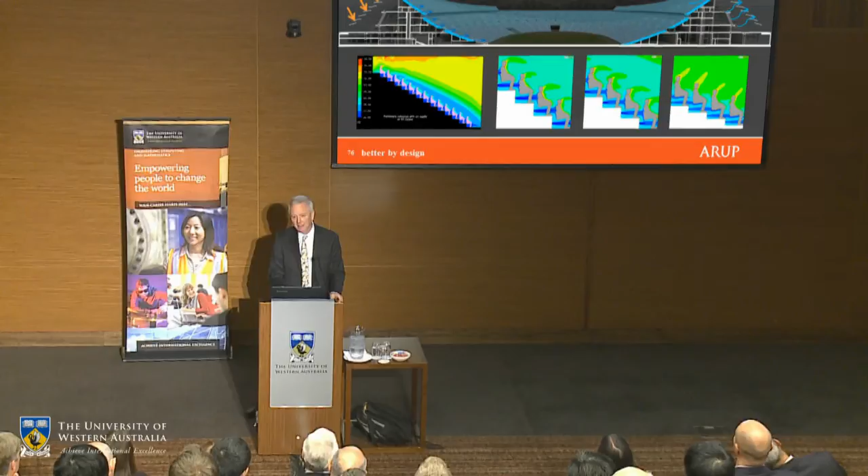So the moving roof is actually clad in ETFE like Beijing, to keep it as light as possible. And then the outside is louvers for just shade for the external concourses. This is a rendering of the outside, so you can see these components.

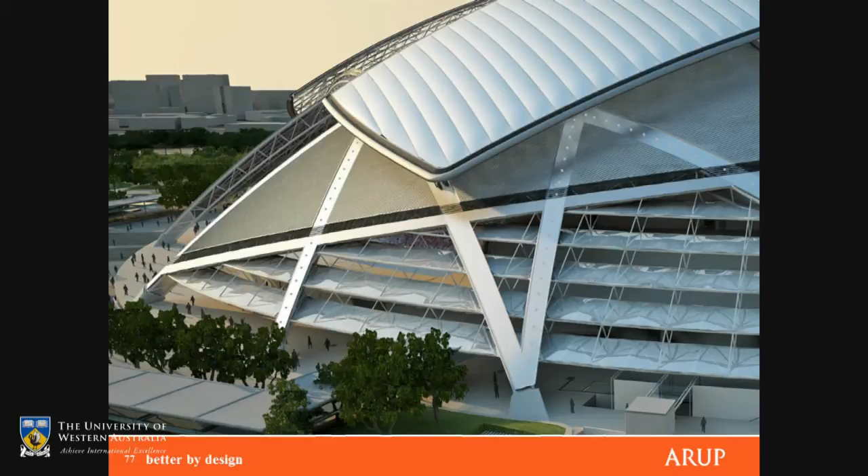So you can see that the pillowy shape is the ETFE clad moving panel. Then the triangular shape, with the lines across it, is the fixed roof, which is Calzip aluminium cladding with a lot of insulation underneath it. And then the louvers down below for the external concourse.

And this is the primary structure, but it's not the whole thing—this is part of the primary structure. So it's trusses. The trusses vary in depth and width from the center of the building, where they're deepest, to the perimeter of the building, where they're shallowest.

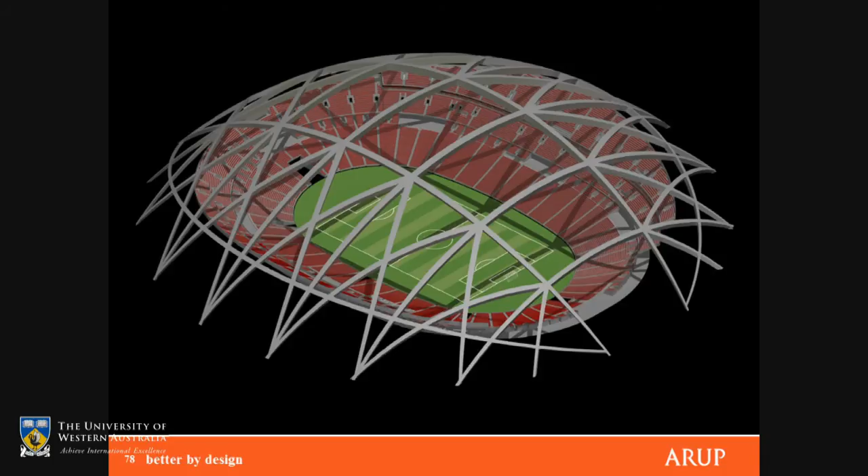And this comes back to this human interaction bit, which I'll talk about later. But there's also these big diagonal trusses, and you're probably looking at it and thinking, well, why are they there? Well, at the bottom of all these trusses is a ring beam that holds it all together. All the sphere is in compression, the ring beam is in tension. But the ring beam cannot cope with out-of-balance loads—it can only cope with a uniform pressure pushing outwards on it.

And what the diagonals do, as this moving load changes, is redirect the moving load outwards. So when the roof is open, it pushes towards the ends, and when the roof is closed, it allows the stresses to come down in the middle. That's quite complicated—I haven't got a decent image to show you, but I hope you'll get it.

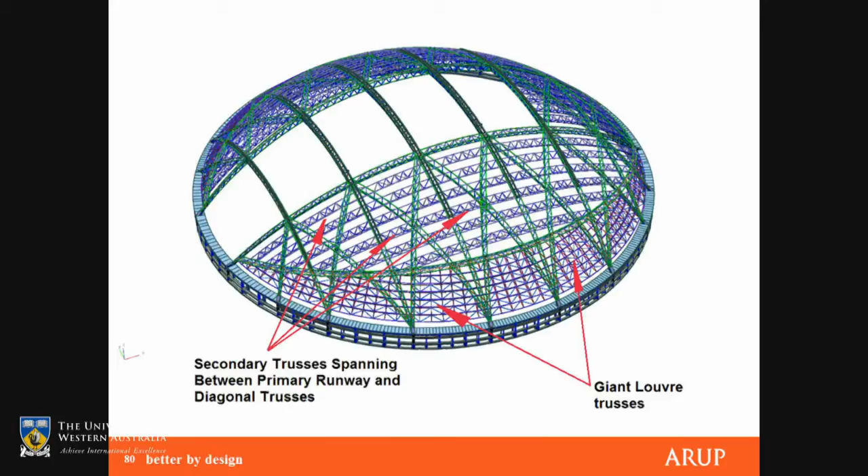And then across that, there's a set of secondary trusses and then a set of louver trusses—lots of different geometries being used in different places to get different responses or different impacts. And of course, here you see that moving load; that's the moving roof in its open position. The secondary trusses aren't shown, otherwise it would just look like a jumble of lines.

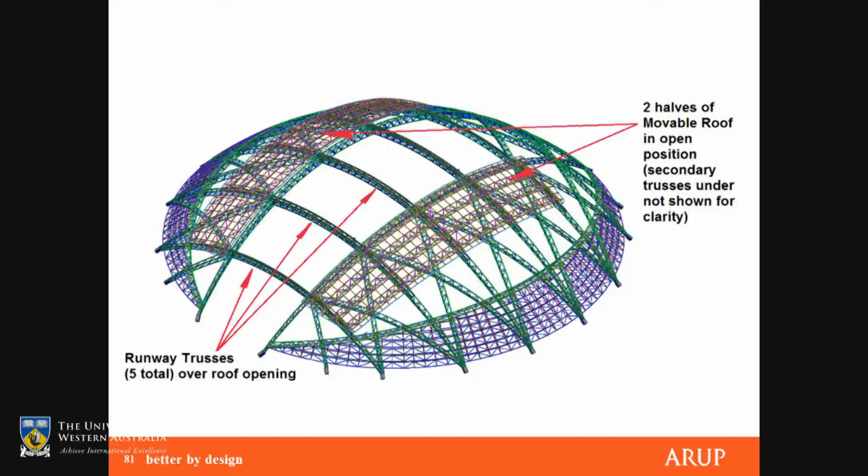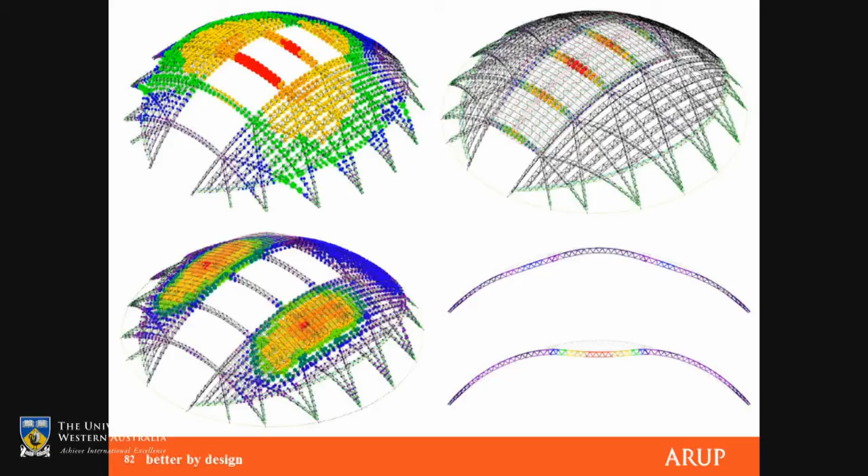This shows you the deflections of the roof, without the moving roof shown in some images and with it on the top right. The top left is the deadweight deflection of the whole roof without the moving panel. The top right is what the moving panel does to it when it's closed. The bottom left is what the moving panel does to it when it's open. And the sections in the bottom right show you that difference—it goes down in the middle when it's closed and it goes down on the sides when it's open. And that was the thing that was really challenging about this roof.

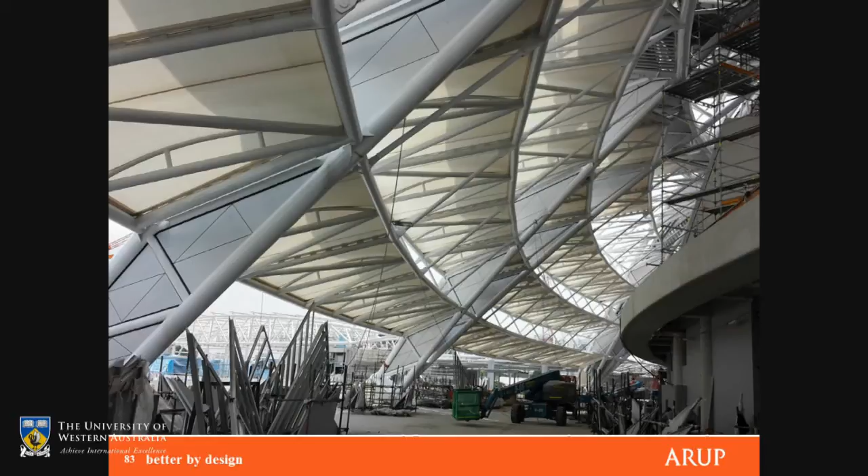And here you see the louvers now complete, the louvered zone down at the concourse. Now I hope you see the benefit of tapering the trusses. They're only 2 meters deep at the perimeter, and 5 meters deep for buckling reasons up at the top center to carry the moving panel. But this brings them down to something more of a human scale, where people get to meet them and interact with them.

And here you see the whole structure. Last week the fixed roof was completed and depropped, so we've now got the world's largest dome now actually exists.

And this is my last slide, which is about the impact of IT in the built environment. You might have noticed I've talked quite a lot about the virtual world. I think this revolution, even though it's been going on all my professional life, has still got a long way to run — the impact the digital world has on the physical world through our ability to design things absolutely perfectly before they're constructed.

It used to be that every building was its own prototype. You only tested it when it was made. In those days, the car industry made physical prototypes and crash tested them against solid bits of concrete. Nowadays, both of us can do it in the virtual world without resorting to the physical world, and we know what we want before we build it.

I would then suggest that construction will become more like manufacturing, where we make things in factories all over the world and bring them to site and assemble them, because we know what we want — we can predetermine it. One reason we pour concrete into timber forms on site is to get it right on the spot, to alter things as we go, to make the holes required for services to pass through the structure. But all of that can now be predetermined; we can coordinate it all in the digital world.

I could talk more and more about this, but I won't, because I'm probably out of time.

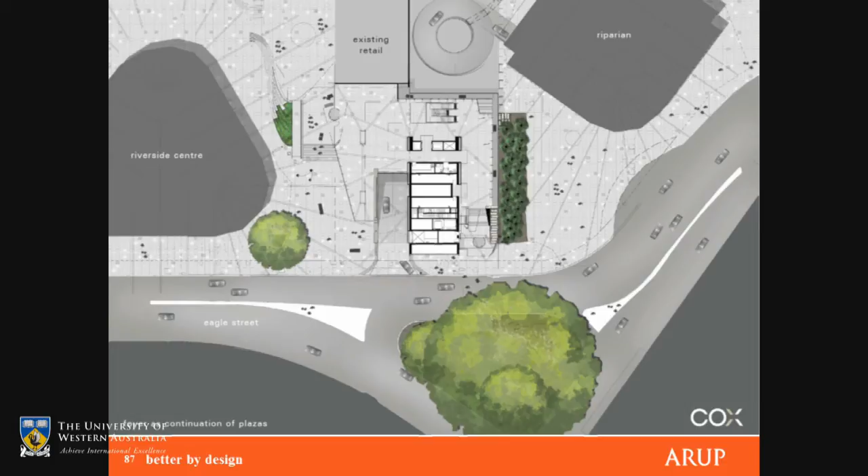Unfortunately, when the core's off-centre like that, it no longer works for a 40-storey building in a cyclone zone to take the wind loads alone. So we decided we also had to have a perimeter structure to make the building work against wind loads. So what we did is we said, well, if we start with a random position of columns — in other words, we only put them where we can — then why don't we just grow them randomly up the building? And let's see what that looks like.

It occurred to me that if you incline columns very slightly, they'll actually work to carry the wind load as well, so that's precisely what we did. We wrote a computer program that would generate random numbers and produce random sets of columns. From every level, we'd generate a new set of columns and test it: are there as many columns leaning left as right? Is it balanced under vertical loads, front to back, and torsionally? Does the floor above get decent support, or do the edge beams get too long? We limited the edge beam to 8 metres.

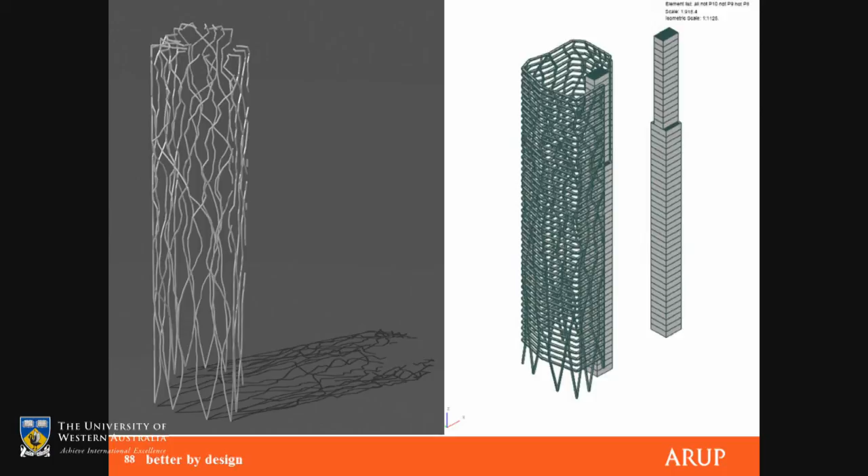As you can see, this is the final one. We made the columns get more random, more chaotic, more excited as you get to the top of the building, because they're carrying less load by then, so you can afford that. Down the bottom, they're quite strict and vertical - they've got to have a 5-degree average lean to take the wind load. After that, they can be more upright.

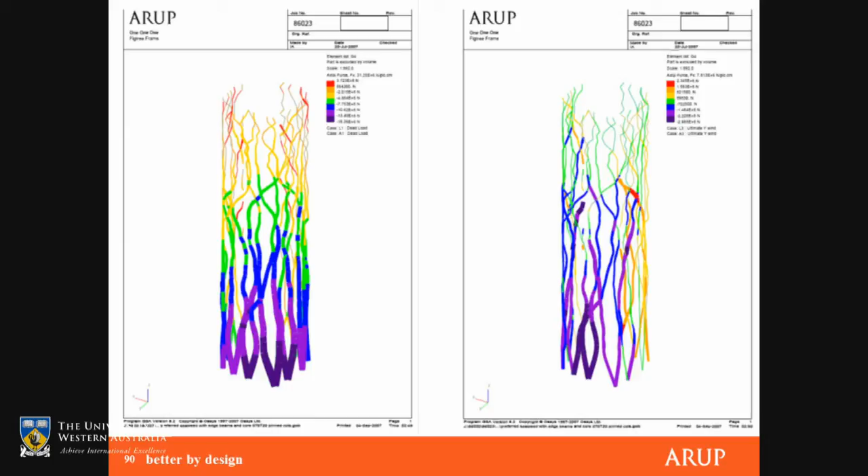This is the Cox drawing of the same building, I'm glad to say, where they've colour-coded the columns according to their size, so you can see that it does actually work - the columns are behaving the way we'd expect them to. For the structural engineers, on the left is the vertical load diagram, on the right the wind load diagram, showing the columns doing what they're meant to do - carrying more load as you get towards the bottom, relatively evenly. On the right-hand one, they're barely going into tension on one face and taking the compression on the other.

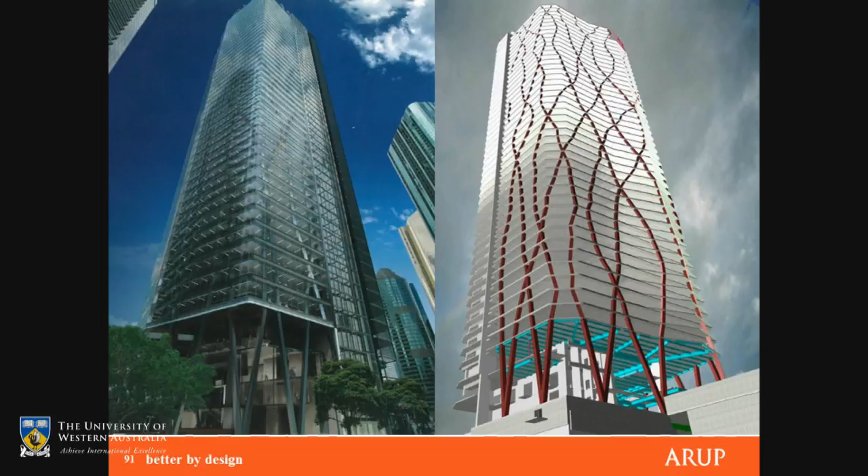This is my favourite drawing, I think, because this is from 2008. On the right is our Revit model, and on the left is the architect's Revit model rendered. And for once, they are the same thing. Only time in my life so far.

We'll get there - and here it is, built, in Brisbane. It was the only high-rise building in Australia to not stop construction in 2009. GPT, our client, had the courage to continue. By the way, we were open with them in the design competition - we said, we think this is a building you'll like, but it'll cost you $6 million more. And they said, okay, we'll have it.

Okay, we'll do it - and they've done it. It was fully tenanted when it opened. So they had the courage of their convictions to continue construction through the recession, or the modest hiccup we had in Australia - I think now we might be having a recession, unfortunately. And there it is, lit up at night. So, ladies and gentlemen, thank you very much.